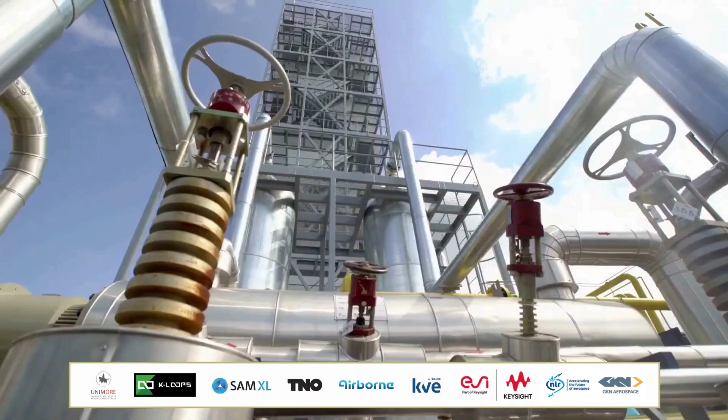This video presents the Penelope Horizon 2020 Project's Aeronautics Demonstration. Led by GKN Fokker Aerospace, the aeronautics pilot line focuses on the advanced assembly of the lower fuselage, integrating a digital pipeline to manage complex composite components for flexible, precise manufacturing.

Within Penelope, GKN demonstrates their cutting-edge work in aerospace manufacturing. From advanced composites to innovative assembly processes, GKN is pushing the boundaries of technology to create lighter, more efficient aircraft components for a sustainable future in aviation.

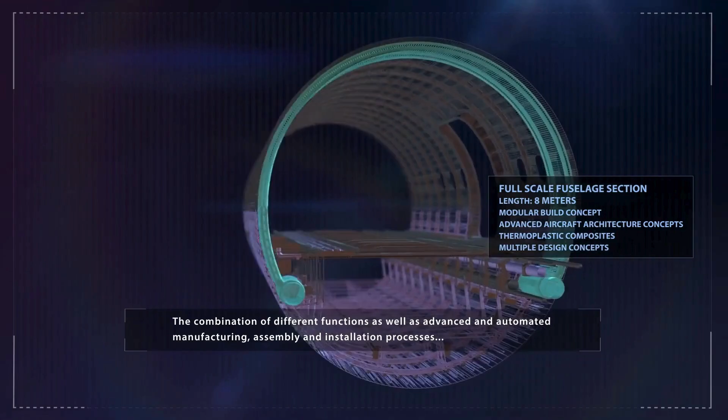The Clean Sky 2 multifunctional fuselage demonstrator with its 8-meter-long composite-made fuselage section is the reference product for the samples used within the aeronautics pilot line.

This demonstrator's achievements in the Penelope project are made possible through collaboration with key partners: Unimore, K-Loops, SAM-XL, TNO, Airborne, KVE, ESI, NLR, and GKN Fokker, driving innovation in advanced aerospace manufacturing.

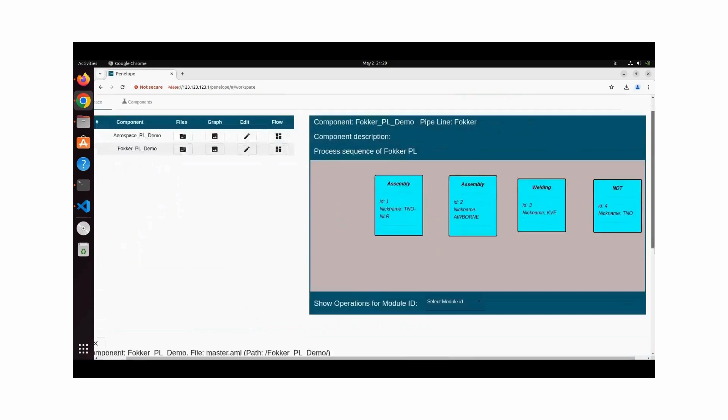Unimore has worked on the simulation of the aeronautics pilot line in a virtual environment using the RoboDK software. The assembly sequence is defined in the Penelope digital thread system. For each integrated system, a module is created and the operations to be performed are defined in the modules.

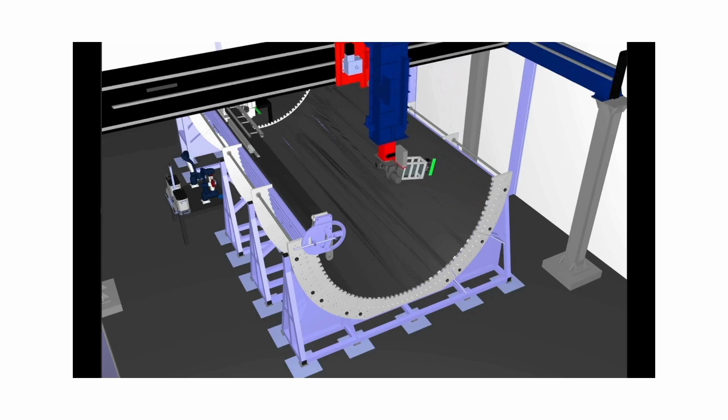An AutomationML file is exported, interpreted by a Python script, and transferred to the simulation controller built in the ROS2 framework. The simulation is executed according to the defined sequence. It includes steps such as measuring the skin thickness by the TNO direct velocity mapping scanner, positioning of the stringers in the inner surface of the fuselage,

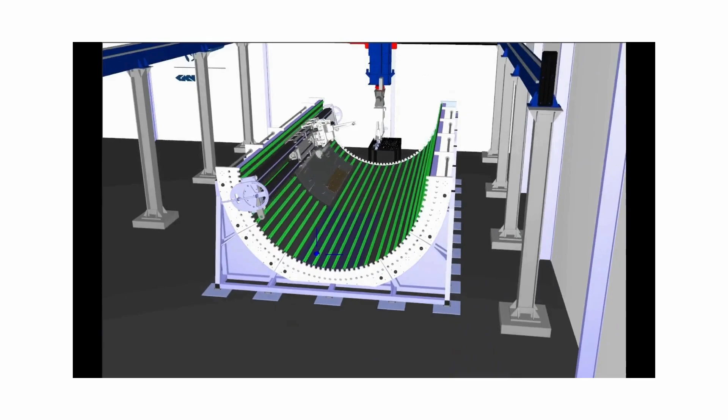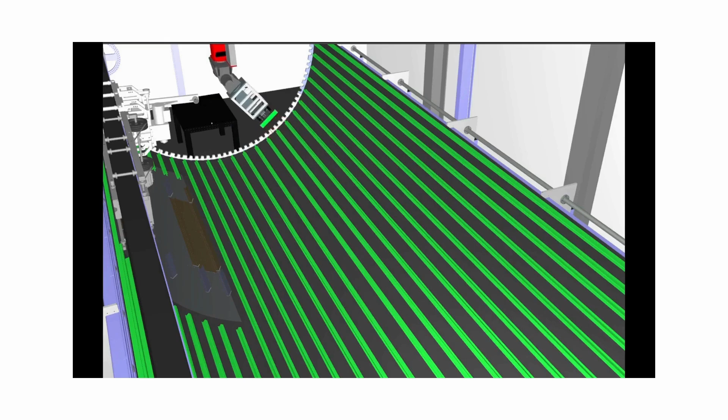induction welding of the stringers, NDT of the welded stringers by direct velocity mapping. Finally, cobots are installing temporary fasteners after drilling and installing permanent fasteners, also replacing the temporary ones.

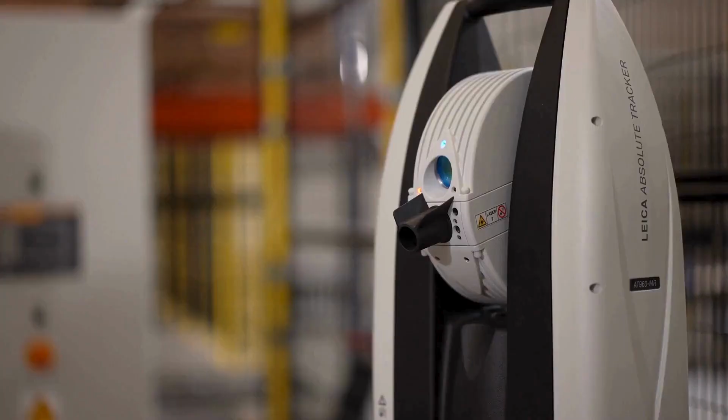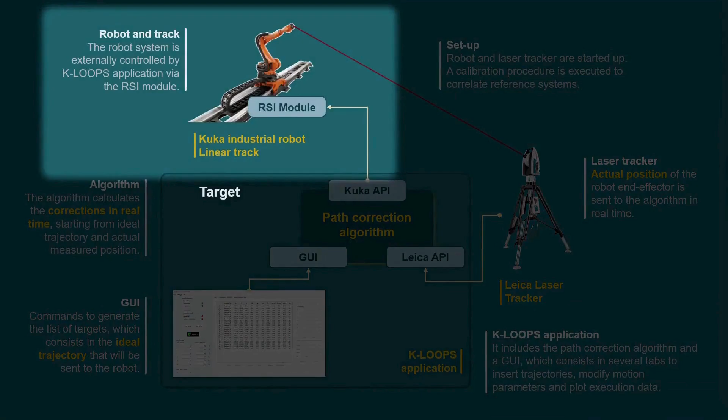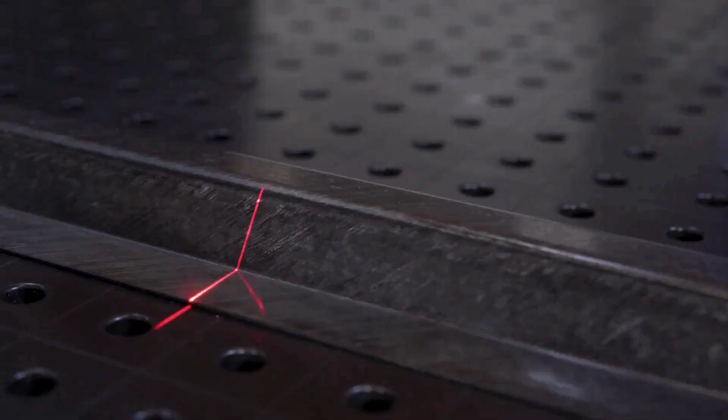K-Loops developed a real-time system able to improve the absolute accuracy of industrial robots, especially in large workspaces. A laser tracker is used to continuously monitor the position of the tool attached to the robot during its job. Once the user defines the job through the application interface, the system takes control of the robot, generating real-time compensated trajectories on the basis of the laser tracker feedback.

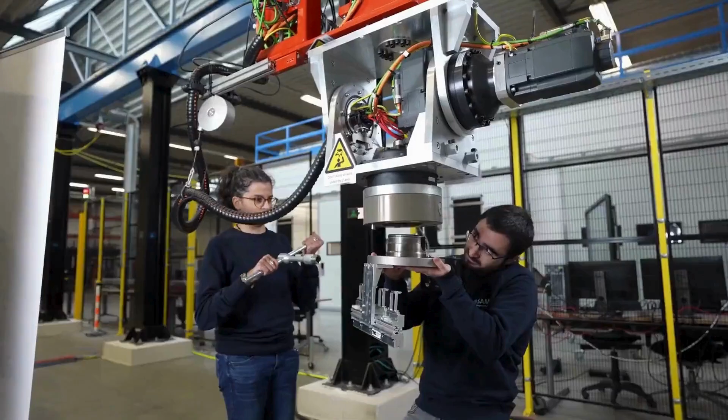SAM-XL is a center of expertise for automating large manufacturing processes, forming a unique liaison between the faculties of the Delft University of Technology, industry, and suppliers. We develop software and hardware to enhance industrial robots' intelligence, connectivity, and flexibility. For the aeronautics pilot line, a zero programming framework was developed focusing on modularity, scalability, and flexibility.

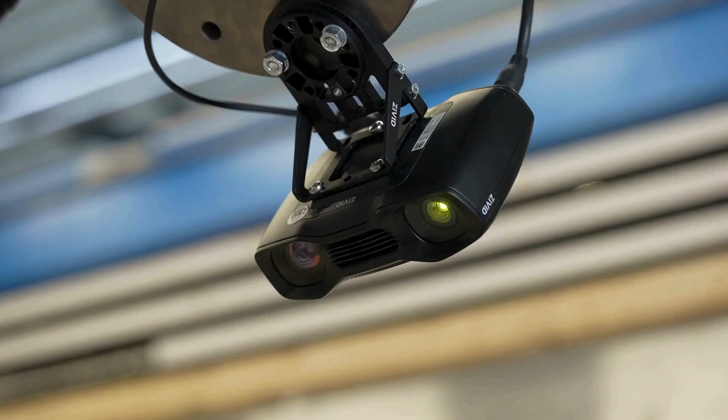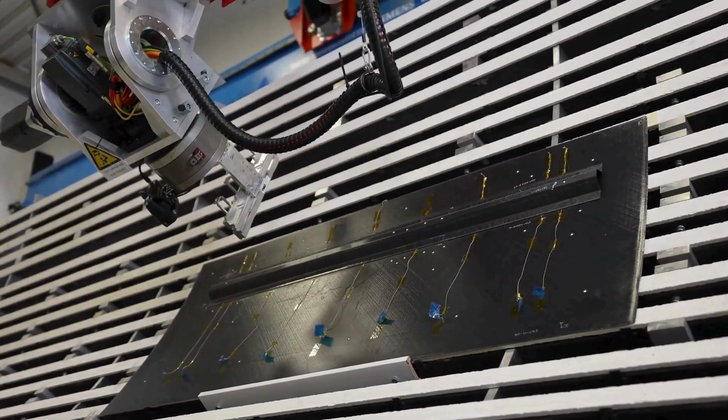The industrial robot scans multiple panels inside of the jig, using a 3D camera to create a digital representation of the object. Along the reconstructed surface, a toolpath is planned for the inspection process. The robot then switches sensors to start inspection along the planned path.

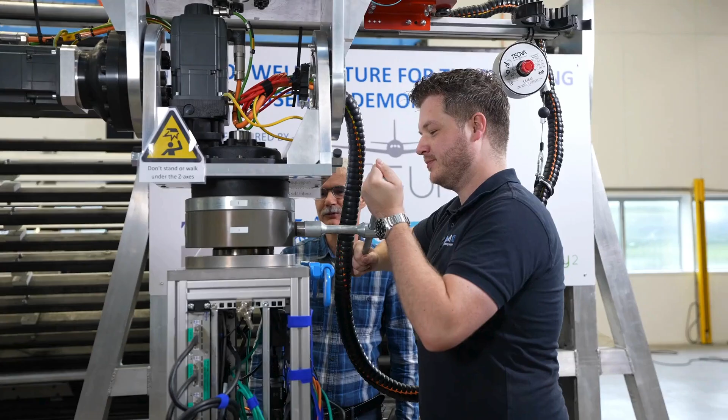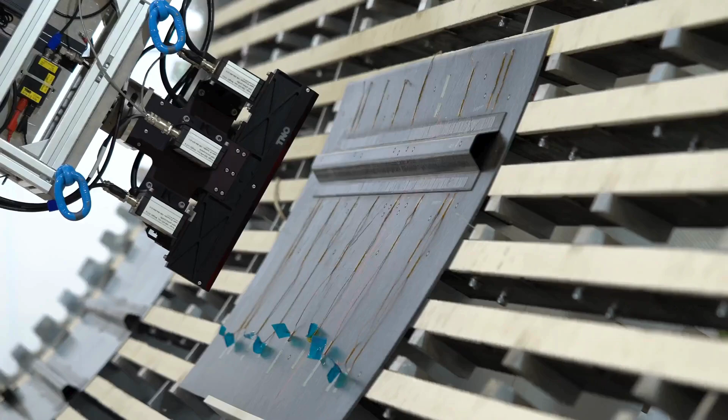TNO developed an innovative, non-destructive ultrasonic inspection technique called direct velocity mapping, or DVM. An ultrasound transducer emits sound waves through the panel, which are measured by a MEMS array. The panel's shape is also recorded optically. Signal processing extracts the speed of sound, converting it into a thickness map.

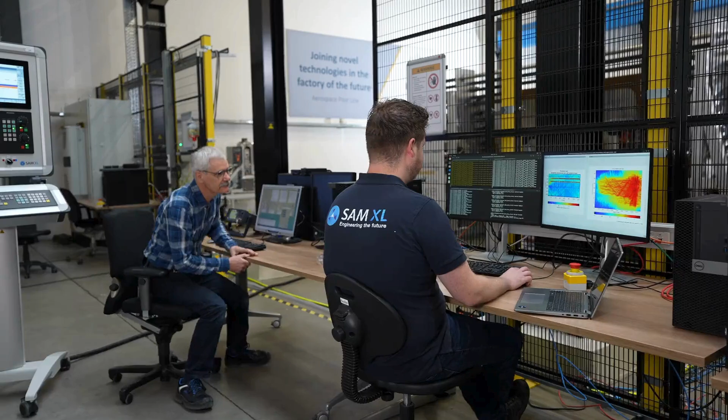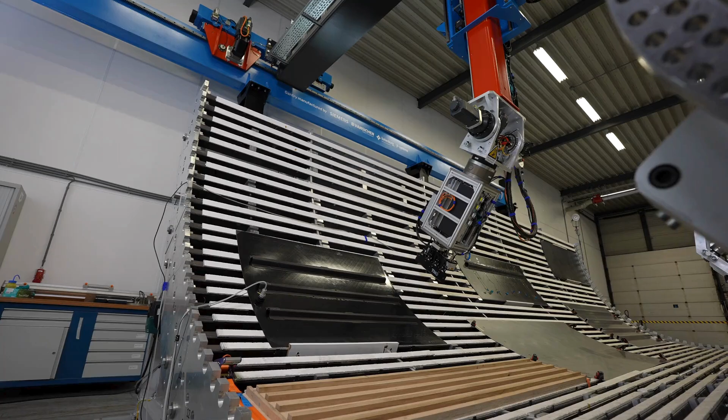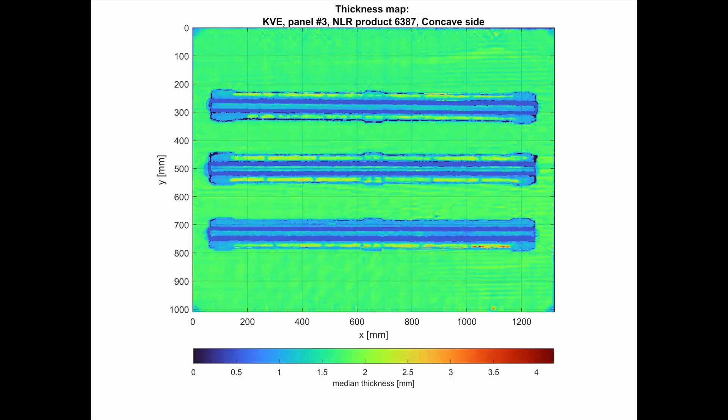The system provides real-time updates, QA information, and integrates the thickness map into the digital thread for NDT inspector evaluation. This fast, dry, contactless, and single-sided ultrasonic inspection method detects disbonds, delamination, and weld defects. DVM is 10 times faster than conventional ultrasonic inspection, minimizing production disruption, offering significant time and cost savings.

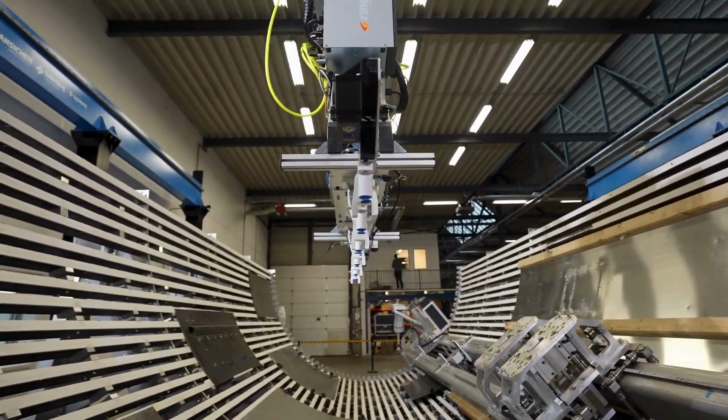Airborne specializes in the automation of composites manufacturing. Accuracy of placement is increasingly important, and therefore Airborne has developed closed-loop control with affordable vision technology. When laying down a ply that is held between a mold and end effector, using a camera is often very limited. In the Penelope project, Airborne has implemented closed-loop control for the placement of stringers.

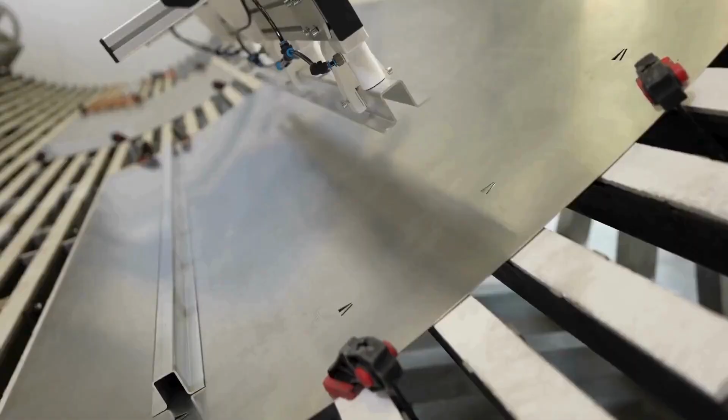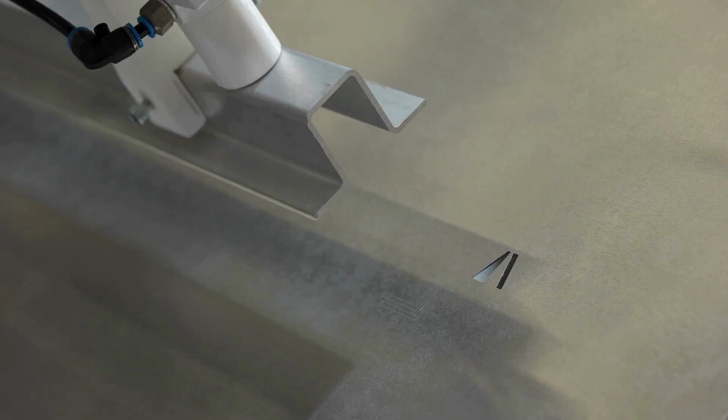Before final placement, the position is checked, and if necessary adjusted according to product references. This way, product and robot inaccuracy are eliminated using a digital, flexible, and fast process. Using closed-loop control, the placement accuracy is increased by a factor of more than 10, to tenths of a millimeter.

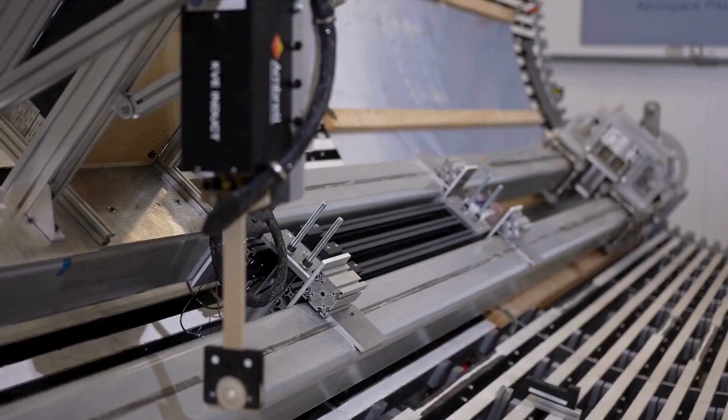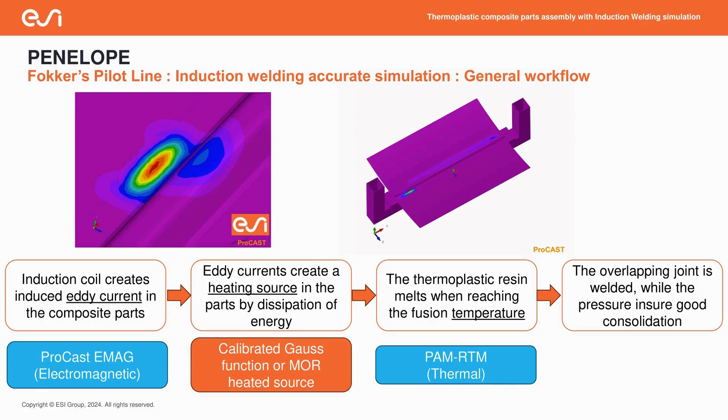KVE has adapted their existing patented induction welding technology to perform single-sided welding required using conventional welding jigs. A welding tool was developed where all the complexity and mechanical elements were placed on a single side to allow cost reductions. ESI has developed a CAE solution to simulate the induction welding process for industrial parts, from the eddy current to the temperature evolutions in the parts.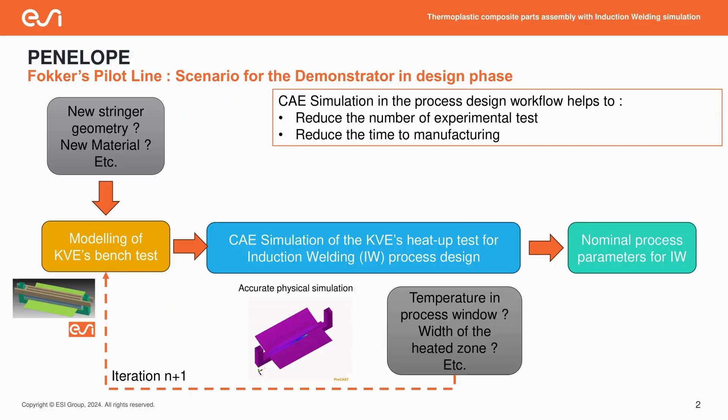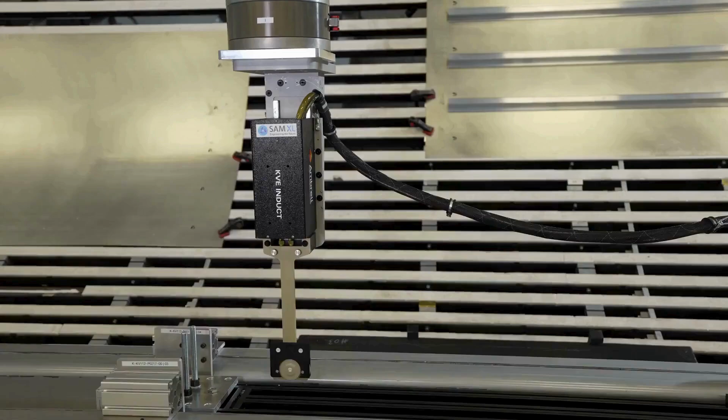The simulations are first used to support the design of the process and establish its baseline for the production. Traditional CAE simulations take hours and are not compatible with inline prediction during production. To address this issue, ESI has developed meta-modeling methodologies for inline CAE-like prediction. This inline module is trained offline with numerous simulations.

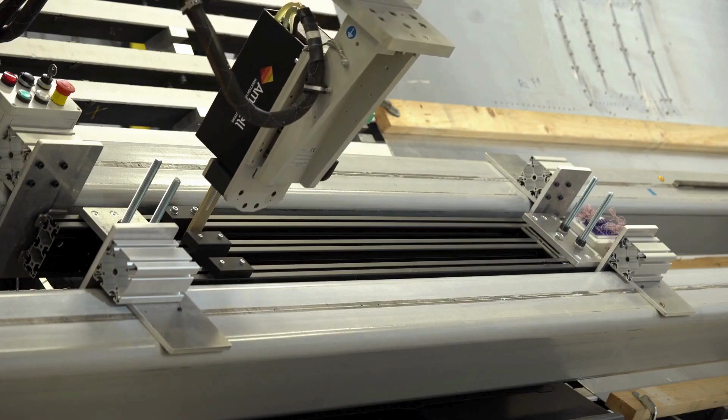Using induction heating, a heat-up run is performed to get calibration data for the modeling. The results from the heating test are transferred to the ESI model. Based on the temperature data from the sensors, the inline module of ESI predicts the complete temperature evolution in the parts, then evaluates the specific weld parameters.

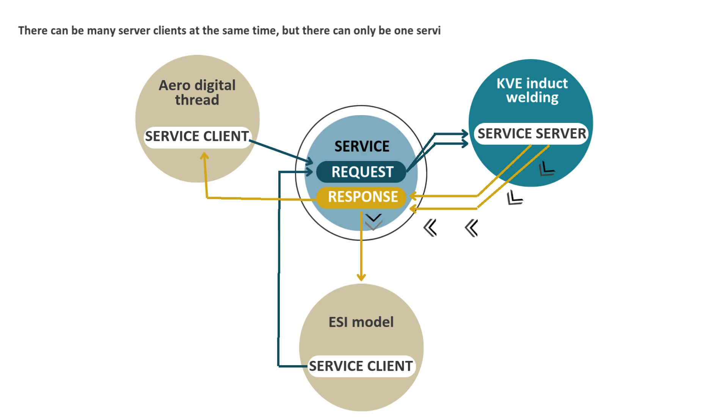A welding run is performed using the parameters generated using the modeling by ESI. The results from the welding process are transferred to the ESI model. The welding data is captured. Using the uploaded data, the temperature can be evaluated.

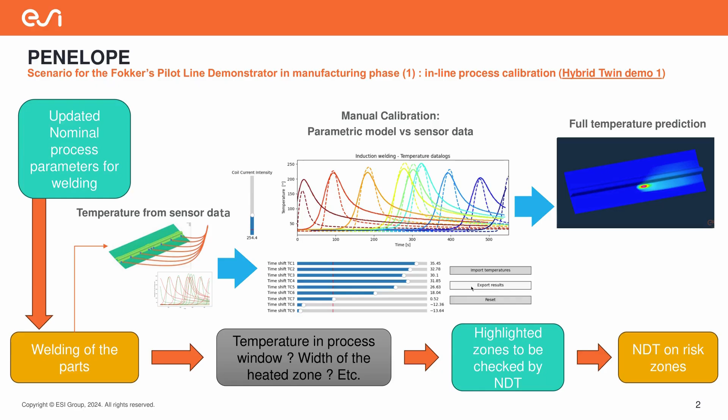Again, based on the real temperature data gathered during the process, the inline module of ESI predicts the complete temperature evolution in the parts, highlighting potential risk zones needing further NDT inspection. The welded panel is ready for further inspection and processing.

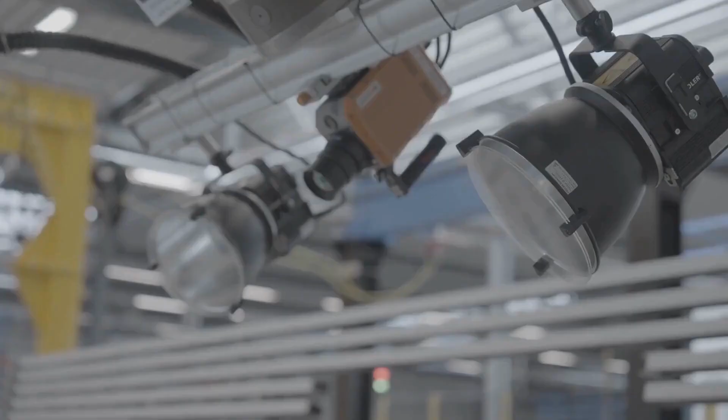NLR developed a non-contact, non-destructive automated inspection based on infrared thermography. Production anomalies such as delaminations, voids, and foreign objects in the fuselage skin can be detected, aided by fast interpretation of multi-domain inspections using AI.

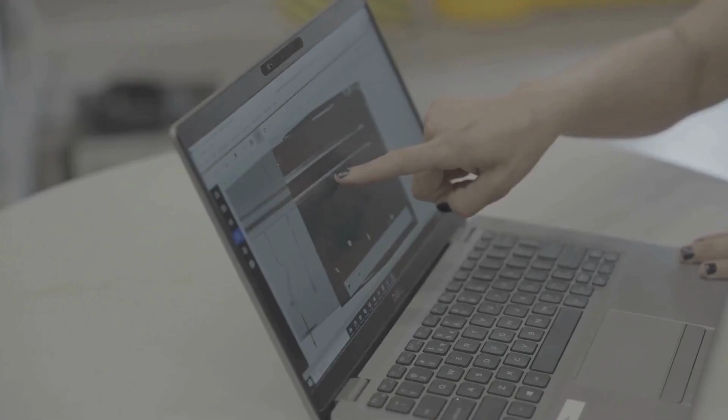The system reports progress information, returns inspection images, and locations of suspected anomalies for the NDT inspector to assess. The automated thermography inspection is 10 times faster than conventional ultrasonic inspection, saving valuable production time and material.

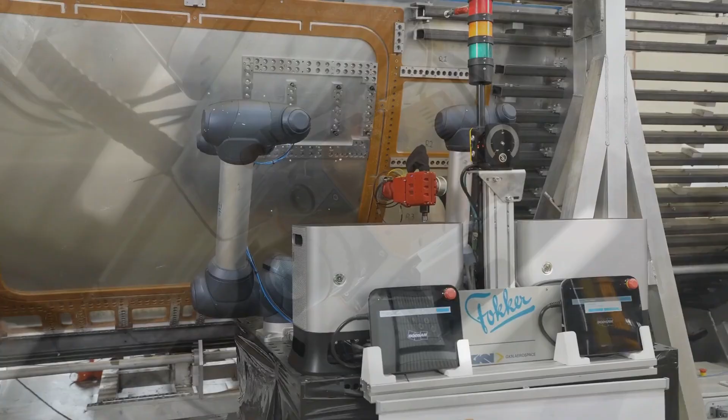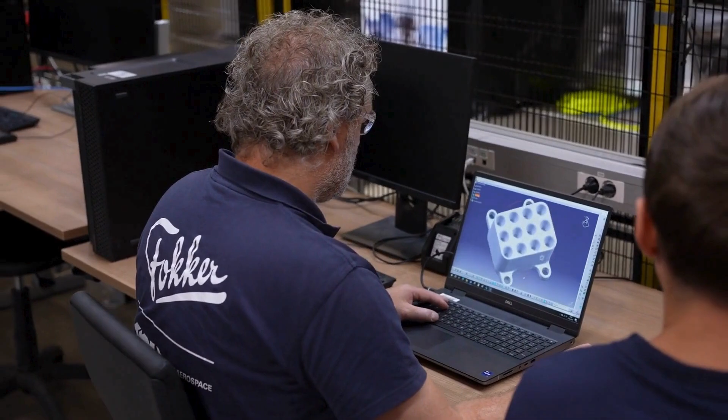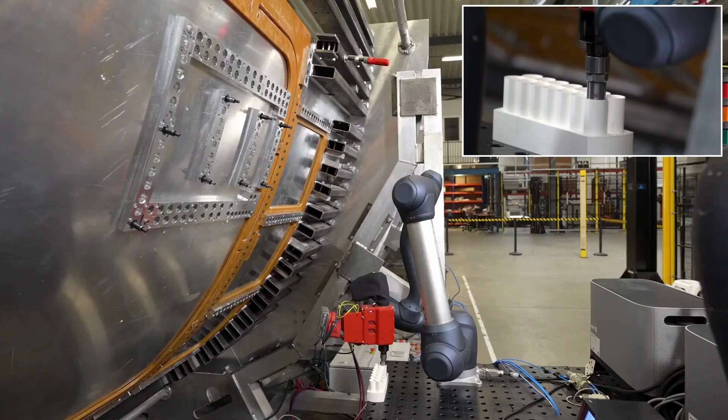Fokker Aerospace developed a fastening system with cobots. One cobot installs and removes temporary fasteners that clamp drilled parts together during assembly. Cobot force control creates a safer environment for nearby operators and prevents damaging delicate aerospace products. The sensors embedded in the cobots allow for surface-guided feature location verification.

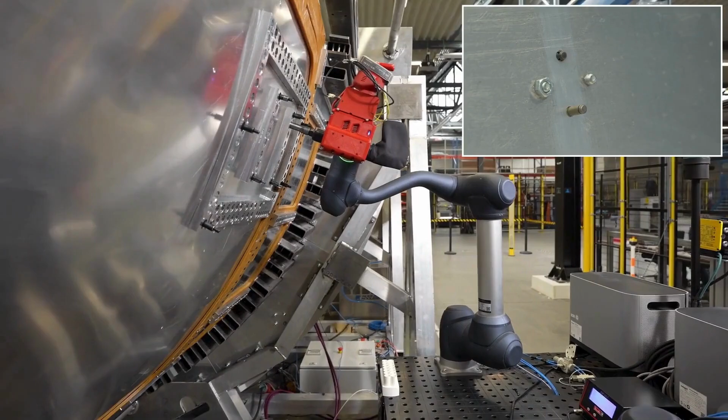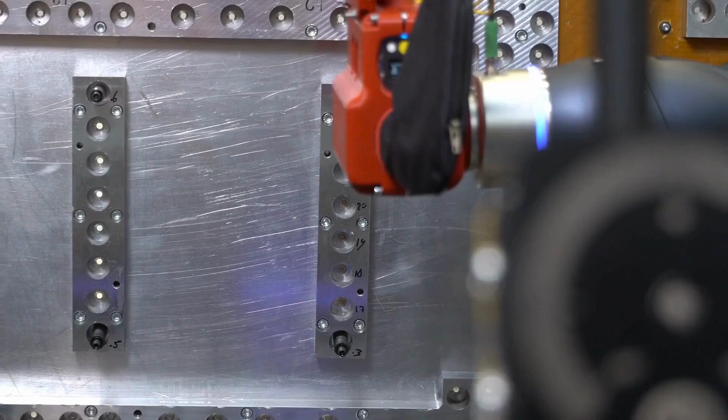Unweldable parts are assembled using high-strength fasteners installed by the second cobot. The system receives data about the planned operation and fastener storage content. System status, operation progress data, and the found hole positions are fed back to the digital thread. This enables closed-loop learning to improve system productivity and design comparison.

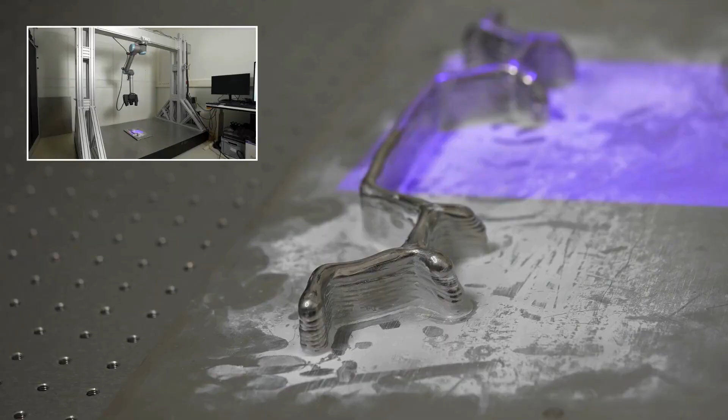TNO has developed a solution to enable milling processes to begin with a 3D additive manufactured part. First, the bracket is scanned using a high-precision 3D camera mounted on a robot. The scan is used in a digital workflow, which automatically aligns the coordinate systems of CAD, machining, and camera frames. This step produces a calibration file and altered machining code.

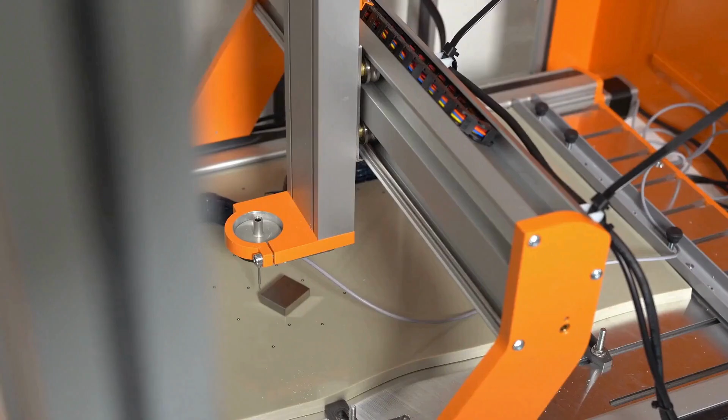The outputs from the workflow are then used on the machine as normal. This solution simplifies the alignment process of complex 3D welded shapes on milling stations, saving a significant amount of time.

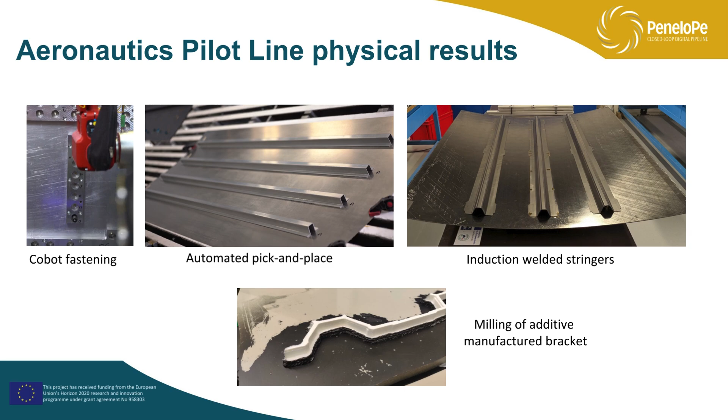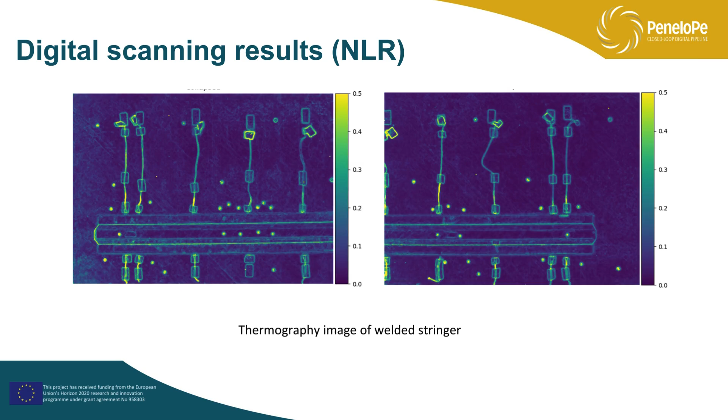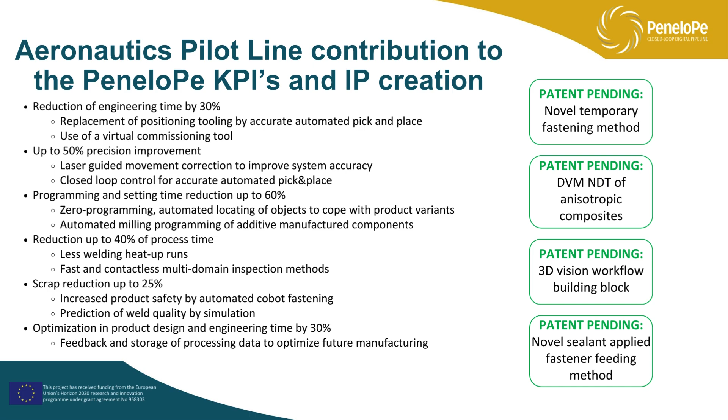The PeneloPe project enabled GKN and their industrial partners to demonstrate technology developments in a full-scale pilot setup, connected via a digital thread. Achieved by increased positional accuracy by laser tracking, virtual process simulation, locating objects by 3D scanning, novel non-destructive inspection methods using AI, automated stringer pick and place, improved induction welding by parametric modeling, automated fastening using cobots, and a workflow to mill parts out of additive manufactured blanks.